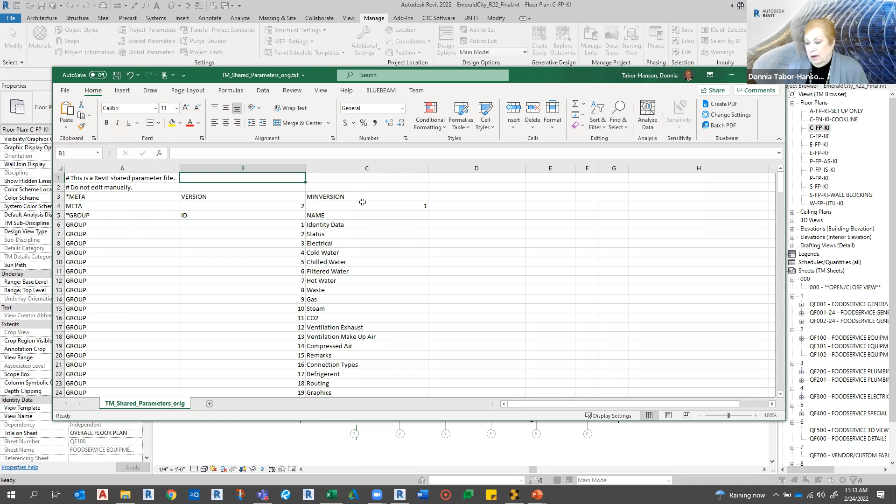This up here at the top is setting up your groups. You've got a group, an ID which is the number, and then the name. I don't know why it's called 'MINVERSION' - I don't ask, that's just the way they do it.

Down here is where you see the parameters. Here's what we're talking about: the GUID, the name, the data type, the data category, the group, whether it's visible, and the description. The parameter name is what 'param' lets us know - it's a param as opposed to a group in this area. There's your GUID - don't touch that.

Don't touch that. These are the names of the parameters, and these are the data types. So 'drawn by' is a text. Data category I found is just for nested families - it's usually left blank, and I don't have anything in there.

The group is referring back to the number of the group here. So text is number 25, which is project information. The drawn by is project information. Then it's visible, and then any descriptions - I think we've got a couple with descriptions.

There are some custom ones that we have. We have a yes/no, '120 dual volt' is set to a yes/no, and it says if equipment has 120 dual voltage, check yes.

Down here there's another one, the asset management that's there. But we have 'TM dual volts' as a text parameter, because we often have equipment that's got dual voltage, and you can't put in dual voltage in volts. So we would put the higher voltage in there - if it's 120/208, we put 208 in the voltage, and then we would check the box that says 120/208.

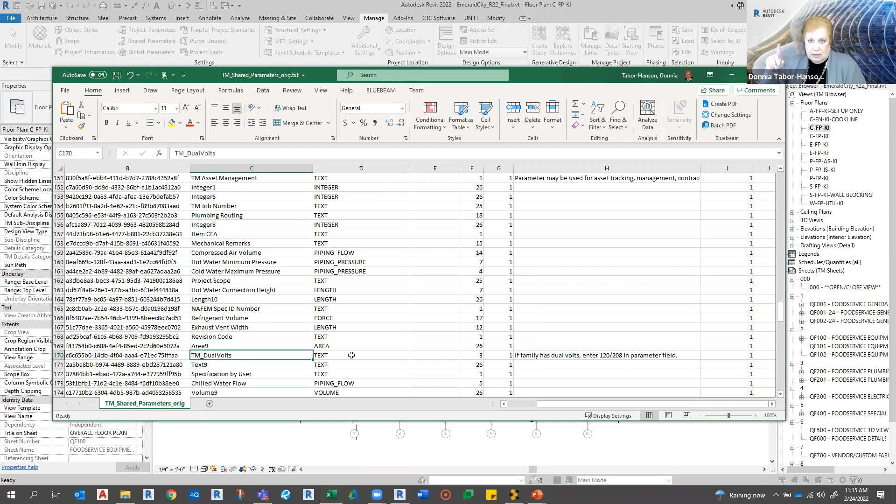Then we could put in TM dual volts, whatever text value we want, in quotes '120/208', close quotes. That lets us have dual voltage show up in our schedule. So we don't schedule volts, we schedule TM dual volts - that's just one way we've gotten around some of these things.

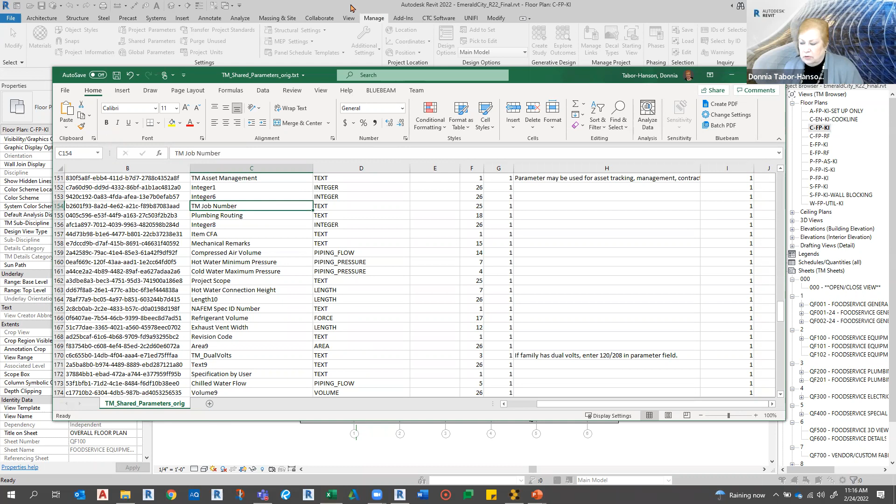We have an item CFA, item custom for anyone, as opposed to the item number. TM job number - anything that's TM is ours, so that's our Trimark one. Some show up under identity data, some might show up under electrical, like the 120/208 and TM dual volts. We try to make it so we can identify any of our custom ones.

Our shared parameter file was actually started from the Foodservice Consultants Society International, FCSI. That way we can deal with other people developing food service equipment, ranges and stuff, the manufacturers. They all use that same shared parameter file, so our electrical connection rough-in height, electrical connection height, and plug all have the same GUID.

So if you're in an industry that may have to share information, you may want to check if your industry has one. I found one for BIM MEP AUS, so I believe that's Australia's. There's also a national BIM library - I'll put a link in the chat about that. I've got the link at the bottom of my PowerPoint, and I'll put it in our chat for this session so you can look it up.

If you haven't started one, you may want to start with one that already has some things in it. I wouldn't want to build it from scratch - there's a ton of these things, especially in electrical. I was lucky when I got here, we already had one.

And project parameters, let me just grab one and look at the modify, which shows you what you can do. Here's where I can set it to instance or type. And once it's set, it's set. And then you can assign it to the different groups. So a shared parameter created in a family is going to be to that family's group, of course. So there's what I mean by the difference in where those things are set up.

So in creating a shared parameter, locate your company's shared parameter file. There should be one. We don't want to find Brian's shared parameters and David's shared parameters and such. We want to have one. And you can go to it by getting to the Manage tab and locating it. And then you've also got to make sure that everybody can get to that same file. So it's got to be in a centrally located file.

You want to look at what groups you want to have. You have to have at least one group to get started. They're basically just, like I said, the headers, category type things, that is what I would call them. But then you can create a new parameter and give it a name and select its discipline, and then the type of parameter. So you can write name, discipline, type, and you can also do a tooltip if you want.

Now, it may seem ironic, but I had a problem come up this week where somebody had the name of the parameter in there, but it wasn't scheduling. She shares her screen, and the parameter was under the same group, had the same name, but it wouldn't schedule. So why is it not scheduling?

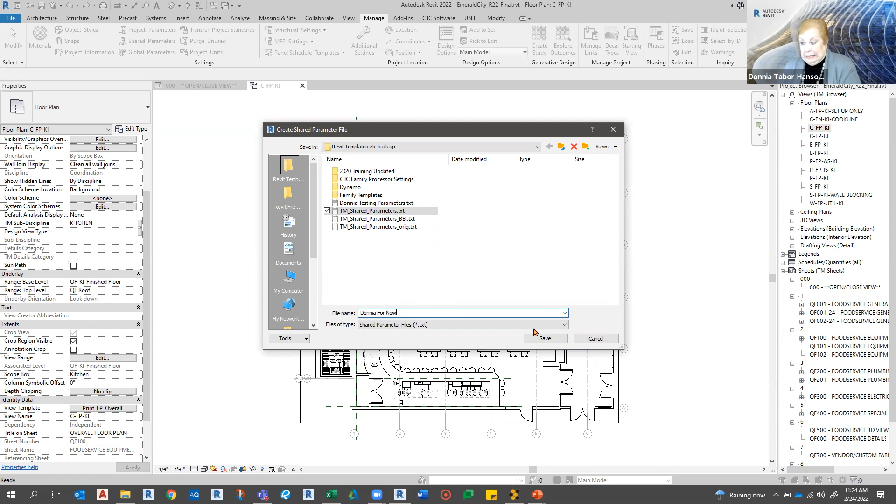So let's talk about those rules for shared parameters. When you're in shared parameters, groups can be renamed or deleted. Let's pop back over to my shared parameters. I'm going to say create. You see I was playing with one. And you're going to have to save one. So here's a blank slate. First thing you got to do is have a group. Group one. Now I can rename it, or I can delete it. Just create it. Now I can do a parameter in here.

You can then pick its discipline. This is what I mean by the disciplines. You can see there's a lot of things in here. You do have to have everything turned on if you want to be able to do electrical, etc. Let me show you what I've got turned on real quick.

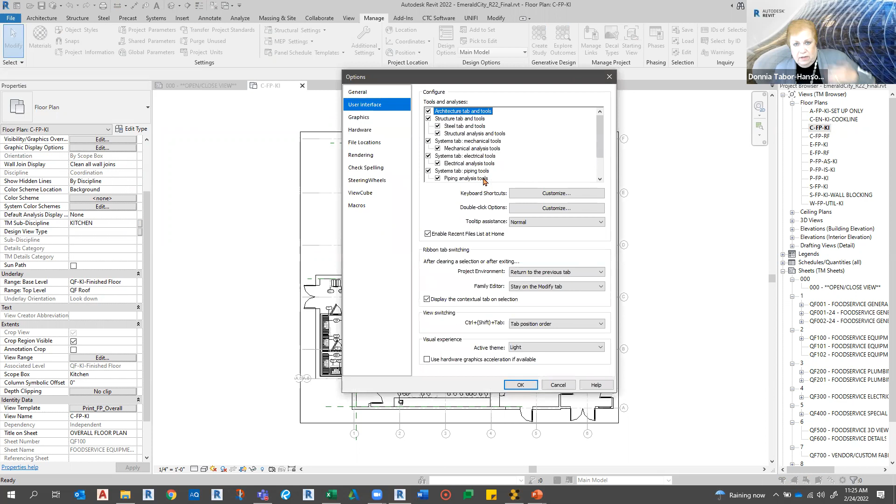When you go in and look at your user interface options, I have some of my team just turn these things off. If they're not going to be developing families, they don't need to see this, and it gets rid of some of the tabs up here. But if you're going to be developing some of those things, you're going to need them on. So when I'm picking here, I can pick the electrical, the structural, the piping, infrastructure, etc. And those are available to me.

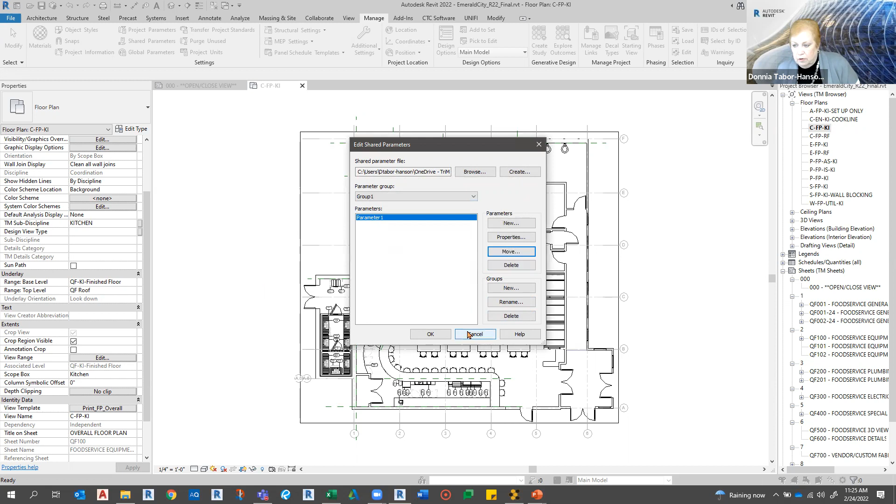So parameters cannot be renamed. When I pick on a parameter, I can move it, I can delete it, I can look at its properties. That's my options. The group can be renamed or deleted. I can move this to a different group. Maybe you put it under electrical and you want to move it to plumbing. You can do that, but that's about it. They cannot be renamed, but moved and deleted.

Hey, Donnia. Catherine had a comment. She says, working for a manufacturer, how do we decide what shared parameters to create for the families we publish when the end user's company will have different shared parameters they use for scheduling anyway? That's a good question. If there's an industry standard, I would go with industry standard, definitely, which most of the manufacturers for food service equipment will. Then they're not going to have to remap parameters when they get it.

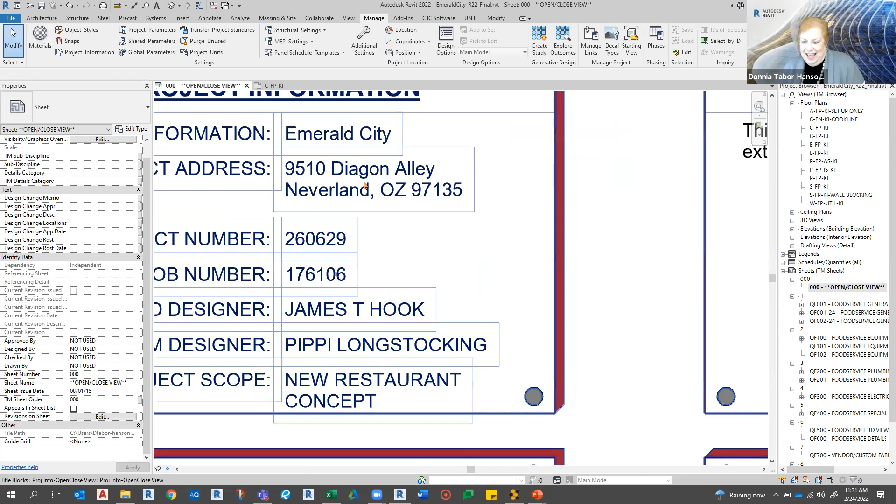And that way, you just fill out the title block, because let me just show you, our landing page is a title block. Our open and close view is a title block. So when you come in here, you're gonna love this place. You can pick any one of these to go in and edit. And that fills in the title block and stuff.

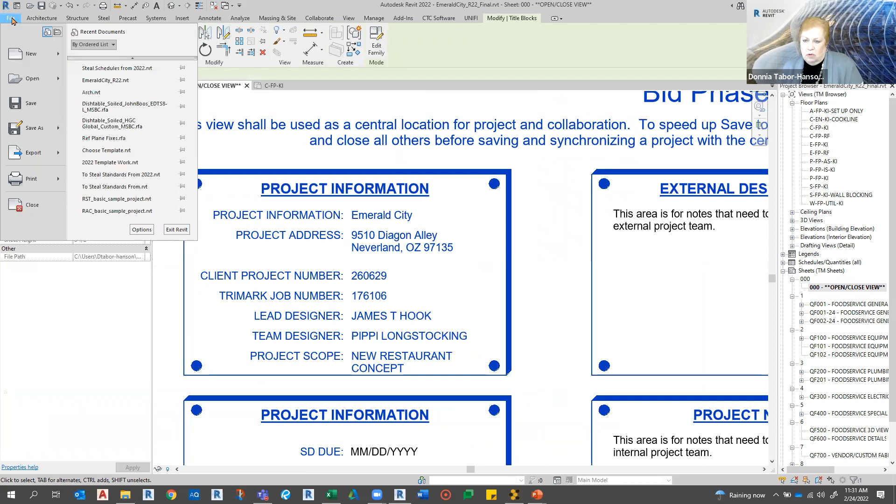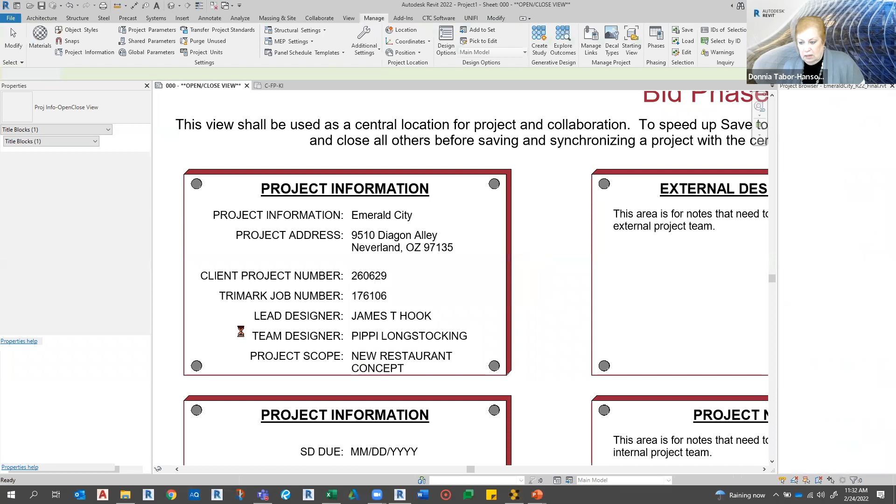This is an older project that I inherited that we use for training. When I open up a new project with my templates and come to the landing page, I'm going to see a little bit more designer Pippi Longstocking. Have fun with it. Yeah. So this one's got a little bit different information. So the drawn by and stuff is here.

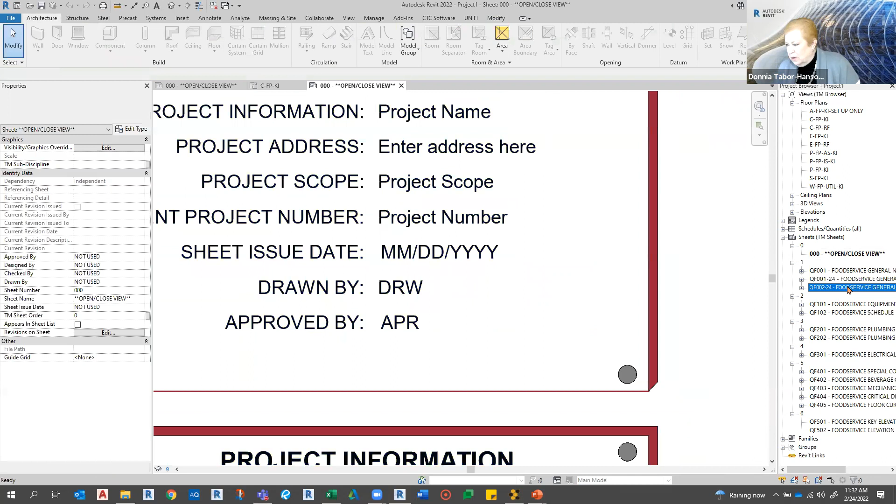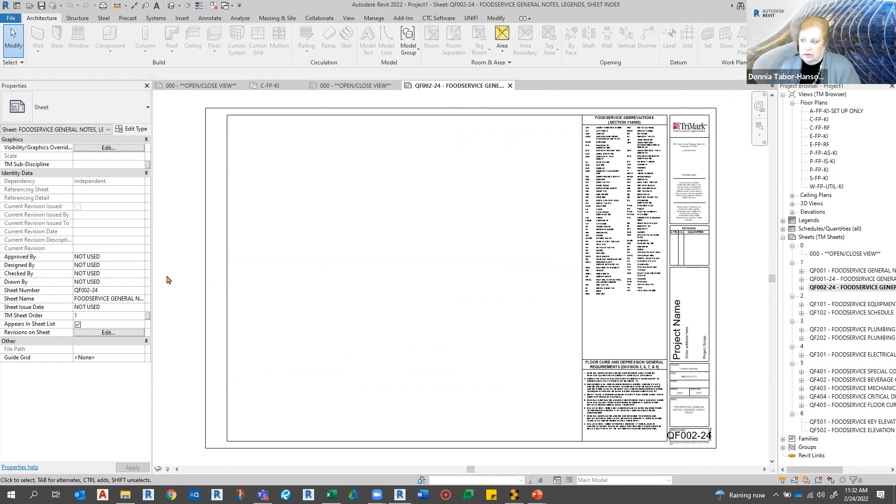And you'll see when I go to a sheet, we've put not used on all of our sheets because we don't use them. That way we don't leave them there and somebody may come in and go, what's this for? Well, it's not used, so don't worry about it. But that way we can put it all in here in our project information. But to add it to the title block and to the project, it had to become a shared parameter. So that's a really good excuse for doing a shared parameter file.

So while looking at the sheets, project parameters, there's one that looks like it came from the shared parameter file, but it didn't. So let me go back over there. I wanted to show this one too, since we were talking about these. And that is this TM sheet order. That is strictly a project parameter. All it does is put our sheets in these orders. So we're filtering by order here for our sheets.

So we put project parameters also if they're going to be custom. We put our TM in front of it a lot of times. Like I said, those are set in the templates, and we don't have to look for it anymore. It's just done. All right.

The life of a shared parameter. Behind the scenes look at him. This is my workhorse parameter. If they don't add anything else to a family, they have to add this. This parameter is added to every family that's in our library. And it's a quick way for me to check and see if someone in our company has touched that family, because if it's got the TM utilities, we're good. It does not show up in tags or schedules, well, at least not the print ones, because we turn it off. We hide it.

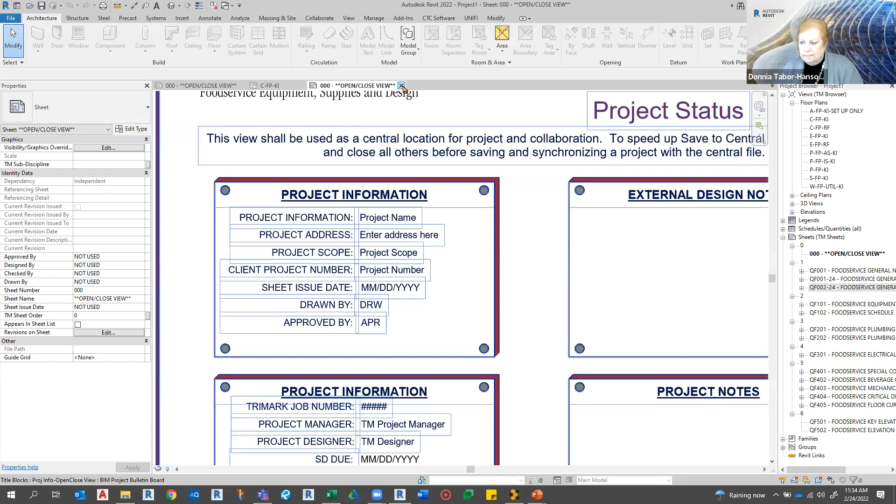So let's make the TM utility parameter. He is a little workhorse for us, and let's just go take a look at some of the things he does. Let me go back over to, not you. I want to go to here, and in here, I pick any family. And when I look at his type, I'm going to find TM utilities. He should be under identity data. There he is. TM utilities is set to 1. Okay, good for him. Now let's check another one.

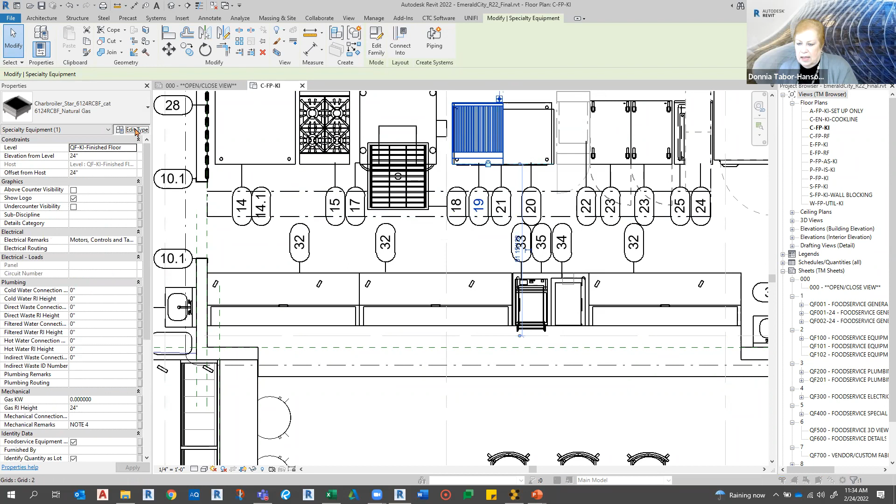No, I don't want the hood. Give me this guy. He's natural gas. TM utilities set to 1. Yes. Our TM utilities has got basically 4 settings. And this one should have a TM utilities of 2. Okay. TM utilities set to 0, no utilities. TM utilities set to 1, plumbing, which includes gas. TM utilities set to 2, electric. TM utilities set to 3, ventilation for our hoods and stuff.

So if it's a combi oven that has to have water and electric, that's a 12 or a 21, whichever way you want to go with it. So he goes into every family with these numbers, and everyone knows what these numbers are. Anybody on my team knows 0, 1, 2, 3 and what you got to have. And if it's multiple utilities, you put in the dual numbers. So he goes in here for that.

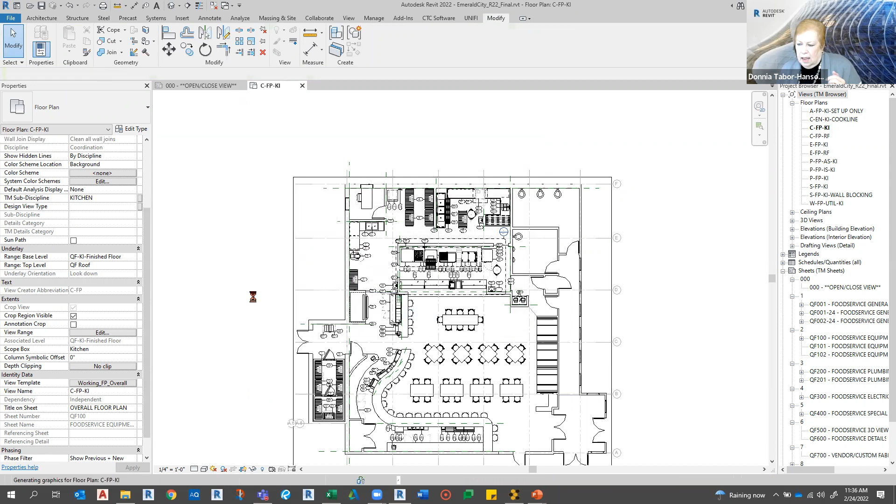But now this is in my print schedule. Let me show you what happens when I go to a working view template. So we have our prints up here. We have our working down here. And this is an overall. And there he goes. He's working now. So the little guy is working, and he's got all of our things without utilities turned cyan color.

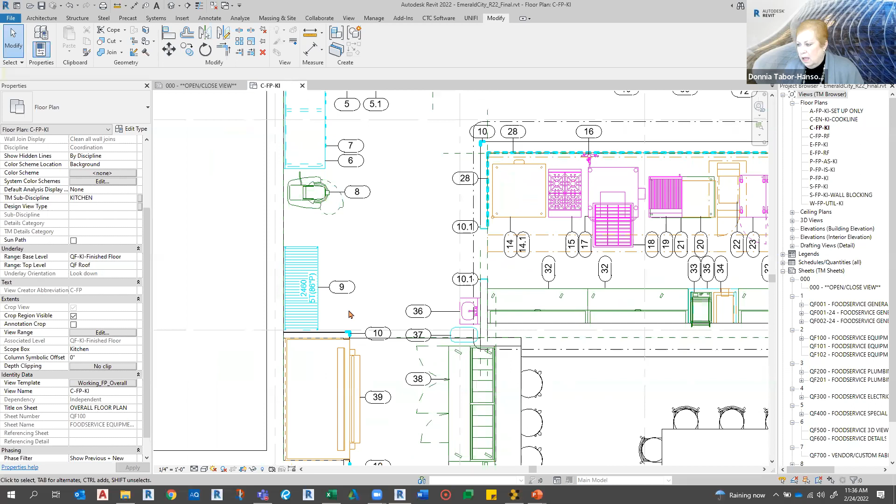Plumbing is all pink. If it's brown, then it means it's got dual parameters. And so this one probably has electric and plumbing. If it is green only, then that's electrical. So here I've got electrical, I've got dual plumbing, and I've got no utilities right there. This is just, you know, the two. So he works in this manner to let us know what needs what.

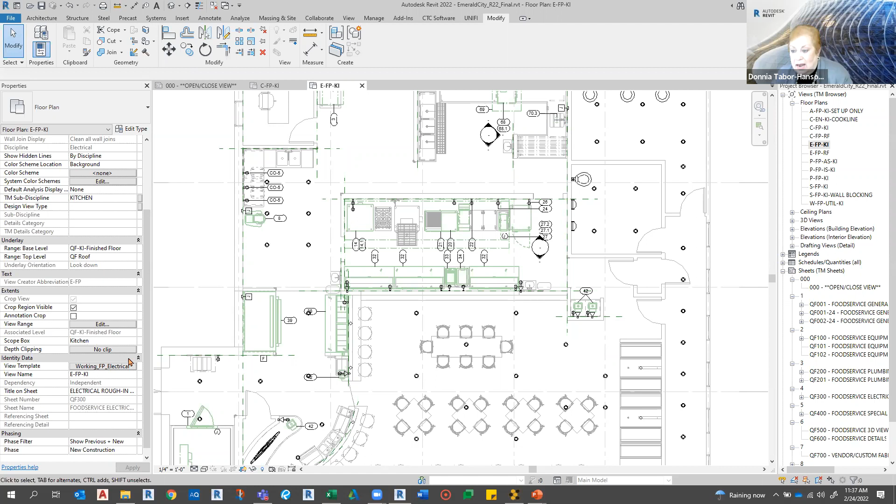Also, if I go to my electrical view and I've got the working view template on, guess what? It makes it real easy for someone to go in here and say, well, here's something with electrical. I got to go put electrical over here. So they can drop in their electrical symbols. And then when we get done, all you got to do is take it back to print. But here's where it goes into it. Under our filters, the electrical rough in, turn it green and put it bold.

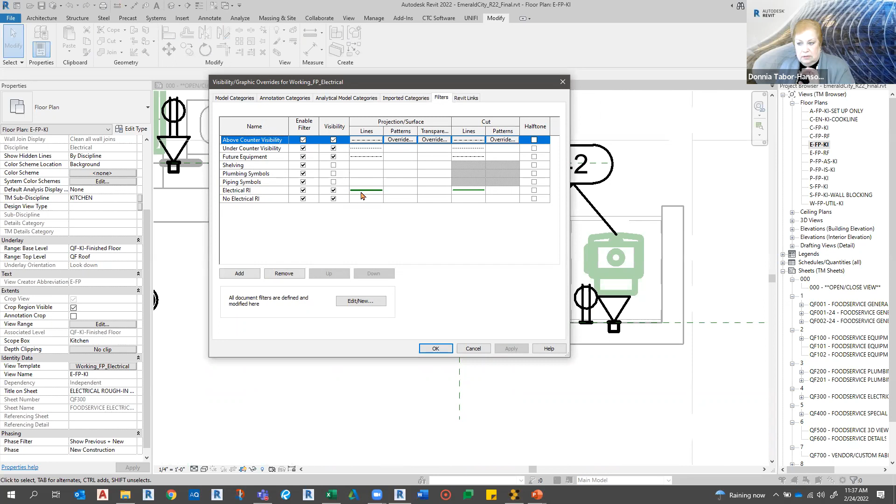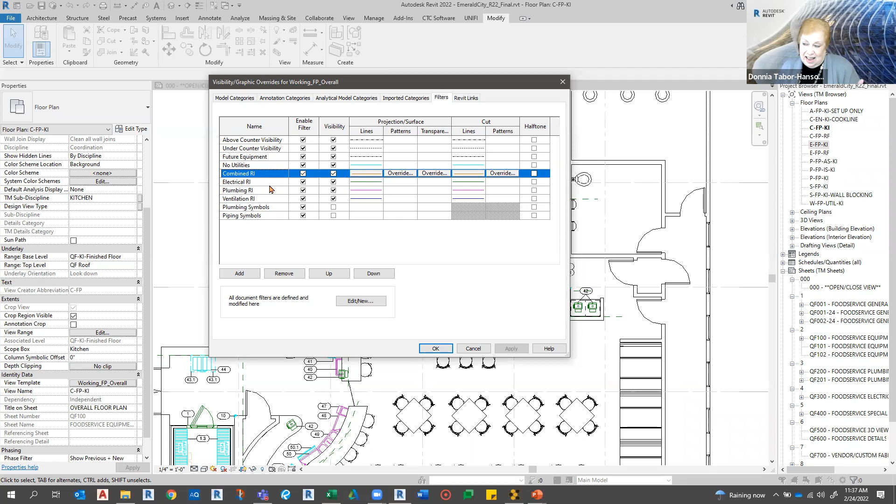Where if I was back on the coordination view and looking at our filters, it's going to have all of them. And it's got the cyan, the brown. So you can see with combined utilities, turn it brown, electrical rough in is green, plumbing is pink, ventilation is blue, no utilities is cyan. And that's how he helps us work to give them a visual so that they don't miss putting in

the MEPs. And then when it comes to schedules, this little rascal does some more work. So he goes into the families and sets up so they know their identity for their utilities. And then he goes into the view templates and into the filters, so that everybody can see. And if something comes in black, he doesn't have the TM utilities on.

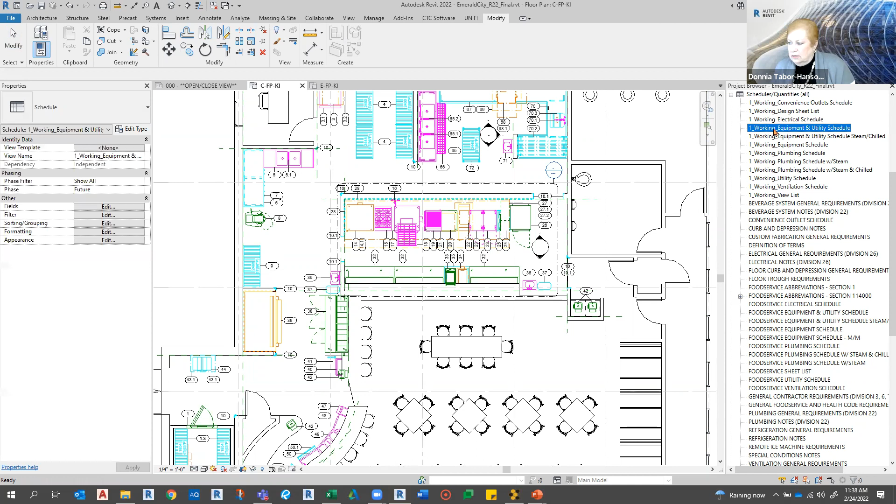That's for sure. When I go to the schedules now, in our working schedules, let me just get the equipment utility schedule. This is the big one that has all the utilities in it. This is where we can check ourselves. Let me illustrate. When it's got plumbing, it's got the number 1 in it. It turns pink in the drawings. It also turns pink in here if there's a 0.

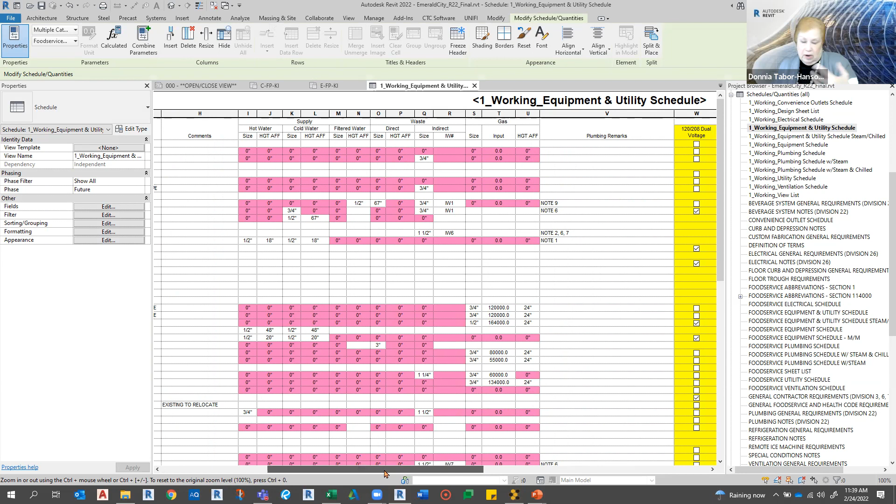Missing information. And a lot of this could be that these parameters should have been taken out of that family, but they still show up here. So they shouldn't, but they still do. And that happens a lot when families are built. They go in and get one with hot and cold water and indirect and direct waste, and they just leave them in there whether they need them or not.

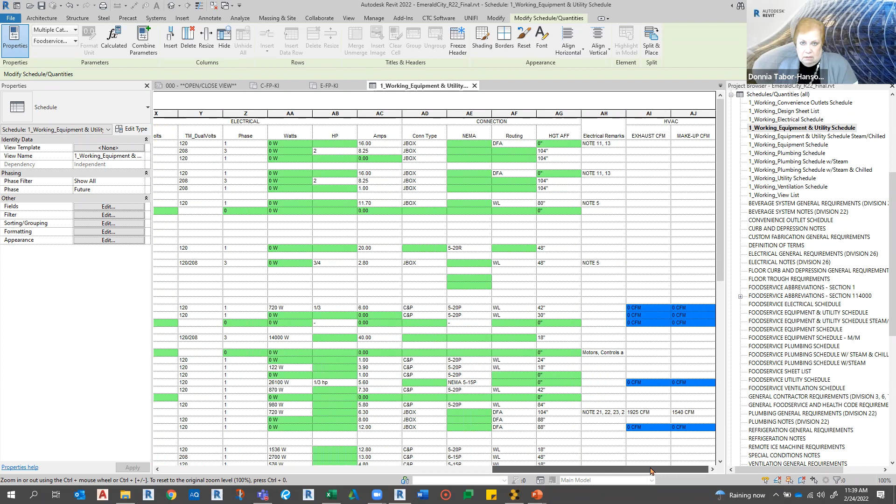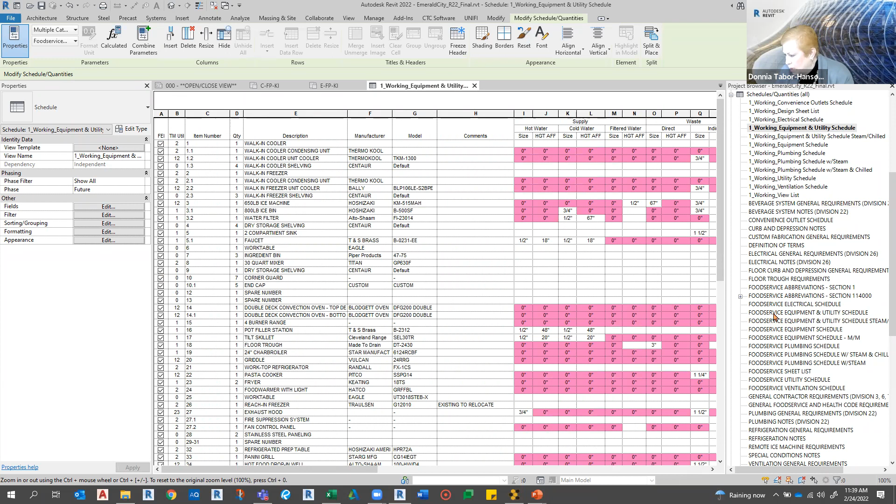And green, you may be missing some information for electrical. Blue, you're missing some information for, oh, we're gonna do schedules next month. Let's just quit this. Here's where we see our TM utilities. And here's where we can see what they're set to. And we can see the family name and such. So in our working template, it does one thing, but when we go to our equipment and utility schedule over here, no color, no zeros, come back next month. I'll tell you how I did that.

So our little guy, he comes in, he goes with the family, he goes into the view templates and the filters and stuff there. He's in our schedules and the filters there, and he is the TM utility, and he is the most utilized little parameter. I love him. So that's how I can know if somebody has gotten a family and brought it in.

But see, our working schedule also has where you can run down through the list. You can see if he has TM utilities or not. So you know that that's there. All right, so that's our little workhorse. And now let's talk about the rascal that changed groups in the middle of a project.

How in the world? I take this project and I'm supposed to be making a template out of it for a chain restaurant, and I'm pulling families out, and I go to check on parameters, and I'm like, why is this one always under other? TM or our item CFA should be identity. It's under other. And I get hold of the designer. I'm like, why did you change all these? I'm just getting started. And there's like 4 families. They're all changed. She says, I didn't. It's making me nuts. I go to look for him and he's under other.

And I'm like, what do you mean? I told it to be under identity data, but any family I open from that project that comes in. So I fix it. I put it back. And then I go into the project and I look at it. It's back under other. This isn't right. I'm a control freak and he's not letting me control. So it's like, we got to find this out.

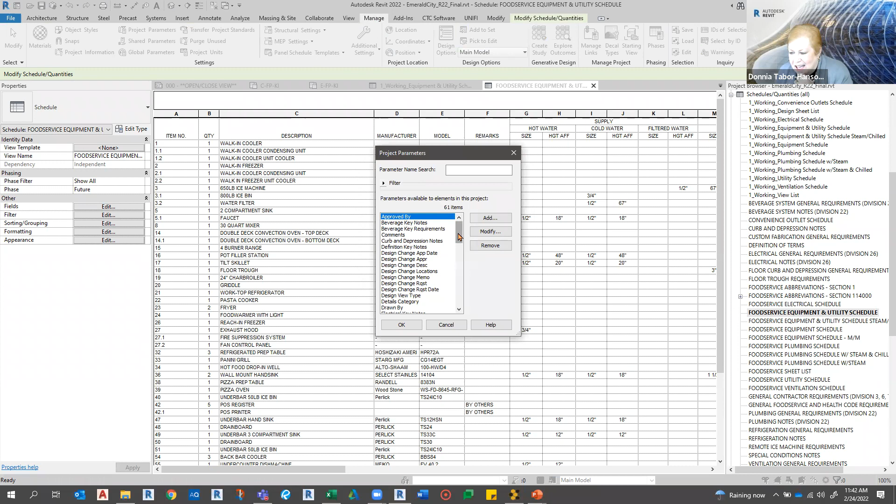So to get around that, I set the shared parameter as a project parameter. Let me show you where I did it. I went into Manage, project parameters, and said Add, and I pulled it in as a shared parameter. I added that shared parameter.

It is a type parameter always, because item CFA is for type, item numbers for instance. So I could go and select the parameter, select it, and that gave it - it was common in length and stuff. Then I could decide where to put it. So I put it on the types of families we have: generic, model, specialty equipment, lighting fixtures, plumbing, electrical. I just put it on all of them.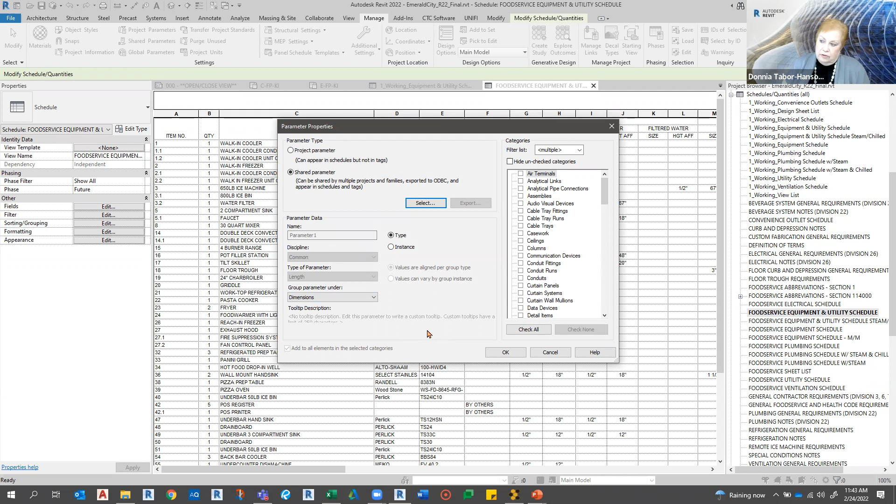When I got done - I'm gonna cancel this - every family we had put in there had to be touched. It took a couple minutes to run through, and it went in and said all of you item CFAs go back under identity data. And if you don't have one, well, you've got one now, because I'm a project parameter.

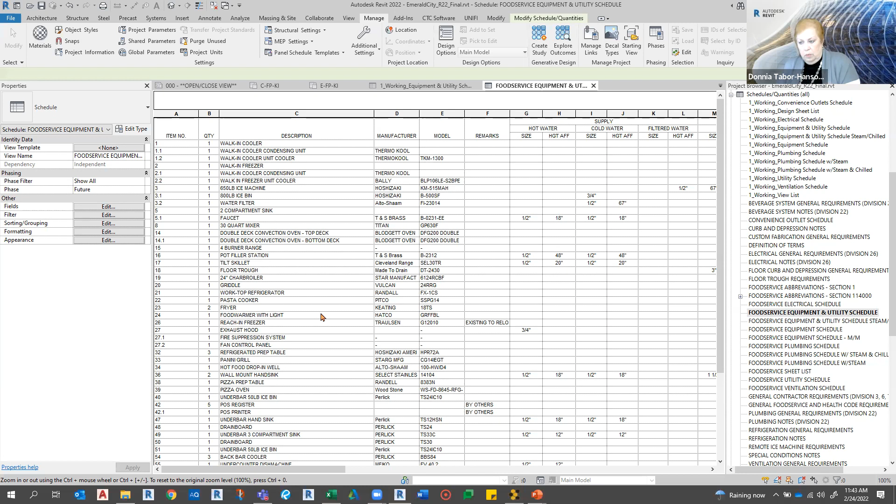Once it got finished with that, I went and removed it from the project parameter, because it doesn't need to be on everything, but I went ahead and removed it. And then everybody was happy. That applied it to all the families in that category, and that put that rascal back where he's supposed to be, because I really don't like it when the rascals go where they're not supposed to be.

I'm a control freak. So the new project parameter can then be moved. That happened like two weeks ago, and I'm like, are you kidding me? How do you do that? So I'm like, I got the perfect place for that.

So now we're down to Q&A. Do we have anything going on in there? Any questions? Nobody else had a rascal like that, just me? Oh yeah, somebody did.

Catherine's on a quest for finding the industry standard for HVAC parts. This could be a long journey, and it may end up becoming an endless journey. I don't know, but I asked her to post it in the discussion for the event page, and maybe somebody will know. I can see if I can find that one that had BIM, MEP, AUS is what it was. But I do have the National BIM Library - they have some shared parameters. That'd be a thing to look at to start with.

We got Michael - Michael says he's had one worse than that parameter issue. Michael, do you want to share? Yes, bring Michael up here. All right, let me find Michael. You got a lot of people here today. Let's see. Michael, raise your hand or something so we can find you. Can that help, please? Yeah, Michael, raise your hand. There we go. All right, you're unmuted, Michael. I was raising my hand in person - I couldn't find the raise hand, it wasn't coming up in the thing.

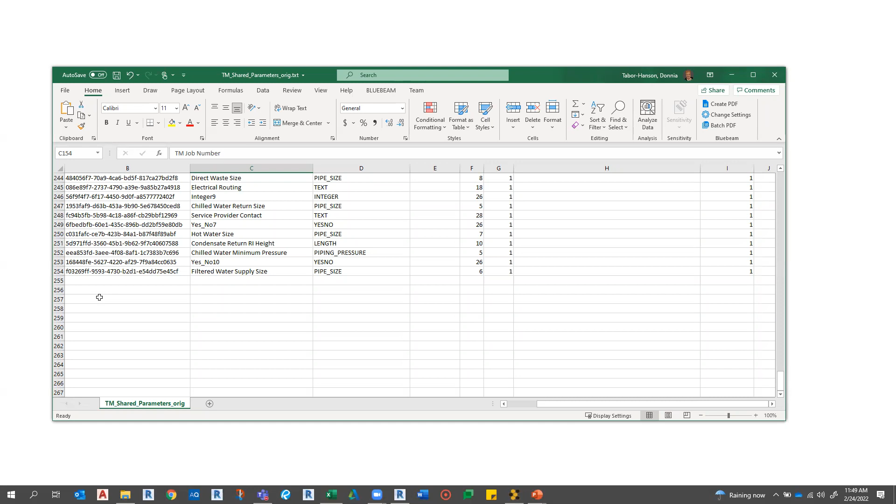So looking at the shared parameters in Excel is super handy to see them, but be really, really careful editing them. Yeah, as y'all saw, I just pulled mine up. It's 254, and I thought we had a lot. 700, yeah, that's reasonable. I like to keep it right there. And they're not in the order that they were created in, because I can see some they're so, yeah, I wouldn't want to go in here and edit that. That column right there scares me.

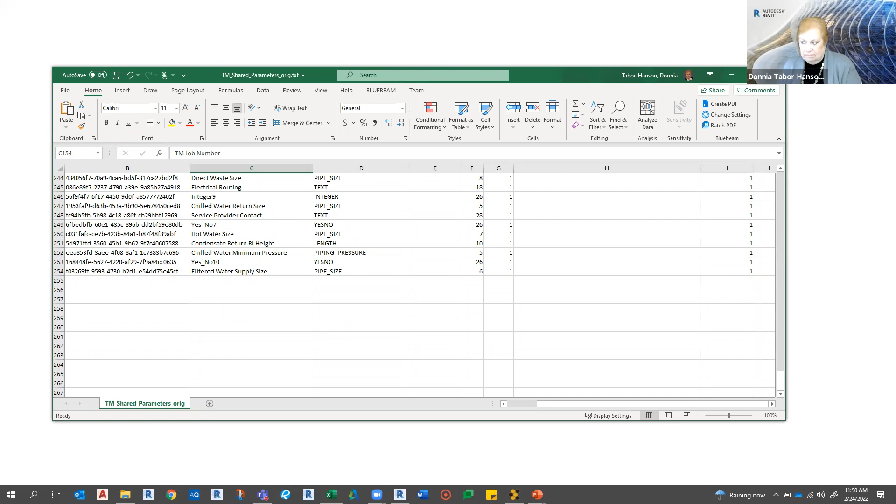The GUID column. Yeah, but I understand what's going on here, but I'm like, no, we're not saving that. And theoretically, your GUIDs should never match anybody else's. But I have actually gotten parameters that show up with another one. So I'm assuming that means somebody else did a manual edit there, or that something's been copied around, and somewhere content moved from firm to firm and somebody edited something somewhere along the way.

Yeah, that's why I like that the company I'm with started with the one from the food service industry. So when I have to get families from various locations that do food service, they'll come in with the same electrical and cold water and things like that, so we don't have to redo things. But I think in one of my second community conversations, I shared the parameters that we have to add all the time, the TM utilities, the 120 dual volt checkbox, the dual volts. I add all those with Dynamo.

If you go back to community conversations, the second one on parameters, I shared how I found the Dynamo script. I didn't write it, I copied it and manipulated it for our parameters. That's the easiest thing to do when new people onboard and ask how to know what parameters go in there. I give them the list, the Excel files that have them, and show how to run the Dynamo. That way we can quickly add custom parameters to any family that comes in, and then they're ready for adoption. We wipe its butt, put lipstick on the pig, put it in the library. That's how we get a lot of our stuff in there, because I can't build everything, and we have thousands of things in our library, but this is going to come from somewhere else.